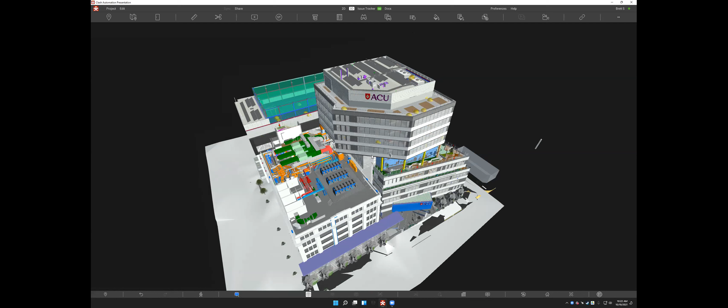And now let's get to the live demo. All right, as soon as I find my Zoom, everyone should be looking at the application. Armin, what's it look like on your end? All good, man, let's get started.

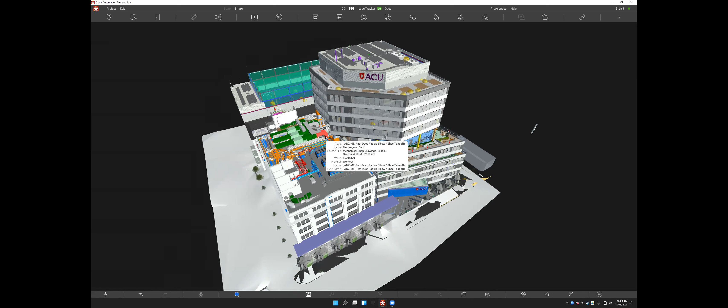All right, so we talked a lot about point A to point B, and I want to point out what this means. If you're a user of Revizto 5, you know you can import the models. Everything comes in through the object tree, and eventually we get to the point where search sets are created. These search sets are point A in this demonstration.

Everything we need can be done here, including creating all the search sets needed for clash, creating exclusion sets to reduce false positives, and organizing these so we know exactly which search sets are for clash and which are for other reasons, such as item counts, navigation, or finding a certain asset in a building. All of this is a very key point in clash detection, and honestly will be one of the main things the implementation managers and I talk about with clients first - what do your search sets look like, and what are you aiming to do with this data?

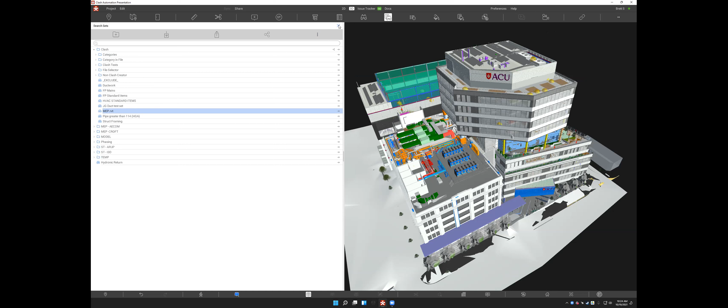Now once we're done with that, we dive into this clash automation tool. We've tried to simplify this as much as we can while leaving as much control as possible. This was one of the difficulties, but I think we accomplished it quite well, as you're about to see.

And I apologize for clearing my throat. My kids brought home a little bit of a cough here, so do apologize for that.

When we look in the Clash automation dialog, we're going to see multiple tests here, see what users are working on those and which ones I need to stay away from. We can see if the Clash has been run, if there have been issues sent, or if they're waiting. The physical number of clashes, how many groups we automatically reduce it down to, resolutions, clash counts, who created it. All of these different items are here for us to see.

If I click on any of these tests, I can actually see all of the criteria that created the test. And when we create the test, you're going to see why all of this is a huge time saver for the way that we coordinate projects. So without further ado, we're going to go ahead and create a Clash test with our Clash automation.

First off, I'm going to go ahead and start to create a new Clash test. This right here is where all of the criteria for the test is put forth. So I'm going to keep it simple, and take the ductwork search set against the structural framing. Now we're going to go ahead and give it a name, duct versus STR.

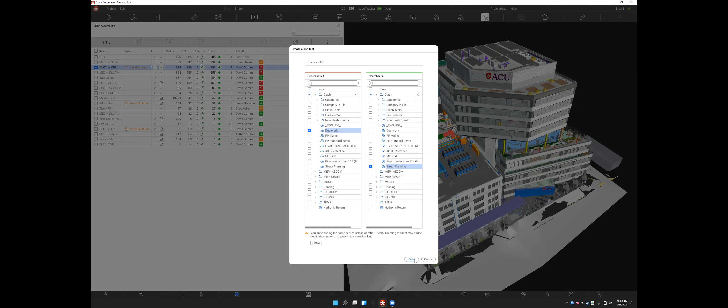Down here, you can see that we've done some other work with some of these search sets that I'm choosing, and it's warning me that duplicated clashes could potentially appear. We're going to go ahead and ignore this, but this is really for your information as you begin to use the tool. This is a demo project, so I think this test has been done before.

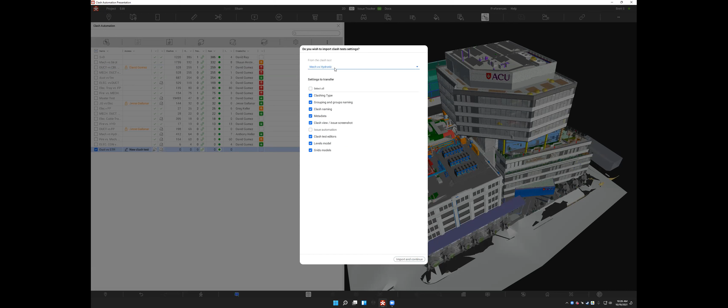Now, when I go ahead and continue, you'll notice over on the left that test is created, and now I can begin to choose what type of metadata I want to be attached to each individual clash. I can do that by choosing the default, or I can even import from another test. So if I want the same metadata from the mechanical and hydronic test for this test, I can choose that and even choose issue automation.

Once I go ahead and import and continue, I can choose the clashing type. This is where we can say, do we want to make sure that these objects are actually touching? Are we looking for a clearance? Each type with a preview of exactly how this works.

Here we can do a clearance in a horizontal and vertical sense, which allows us to provide clearances for things that need a bigger horizontal clearance than they need a vertical clearance, with the ability to choose those distances.

In this case, I'm going to go with a hard collision, and we can also choose elements or geometries. Think of elements as intelligent BIM assets, so these are your Revit families, your CAD groups, your Tekla part files. All of that would be considered an element, and the geometry is the geometry inside of the element.

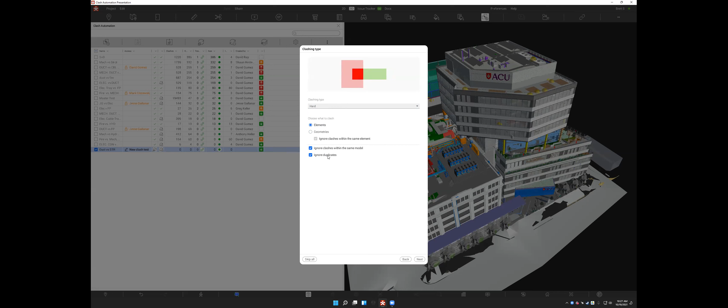We can choose to ignore clashes, duplicates, and as we move through here, you're going to start to see how much criteria we're actually setting up. In this case, I'm going to say I want the room and I want everything to be grouped on what that system classification is.

So I'm going to go ahead and throw that in there, and I'm going to move this up to below room, and we're going to take proximity down to the bottom. You can see it's very easy, drag and drop, right?

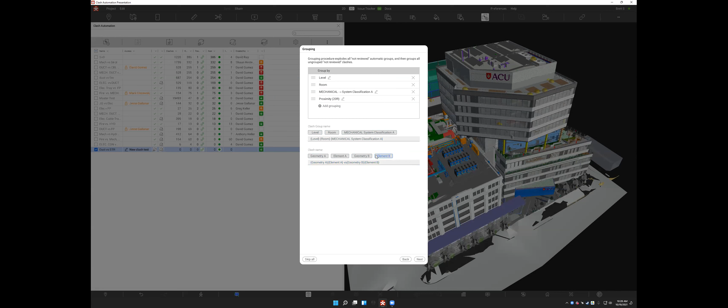And what has happened as I'm dragging and dropping? Our clash group name is automatically being filled out. Our clash name is automatically being filled out here. Everything that we want is being done automatically for us.

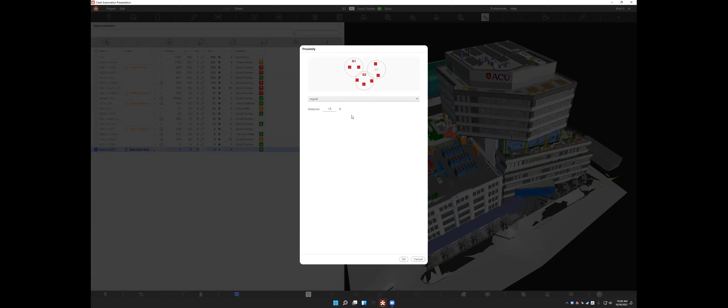Here we can even set a proximity. We have regular chain proximity, set up a distance of that proximity. Proximity is going to be a huge advantage to this grouping tool to avoid things like, instead of items being edited, their GUIDs changing and making sure that those get into the same clash groups that the people receiving them have gotten before. It's an effort to reduce confusion, not only make the lives of VDC people easier.

Once I get done with this, I move on to issue automation. Now in issue automation, this is something that we're going to be talking about. What we hope is that everyone gets to the point where they get to automate everything from the time search sets are set up to the way issues are created.

Now, because the way the industry works, we feel like contractors will take a little bit longer to get to this simply because they work with various inputs, right? Different architects, different engineers, every project, there's different people winning those projects.

But for designers and engineers, you are in control of the way that you create things, which means you are in control of your search sets, your standardization. And we really feel like design and engineering firms are going to be able to almost completely automate clash detection and work it into their services, or just use it to better their final product and make it more constructible.

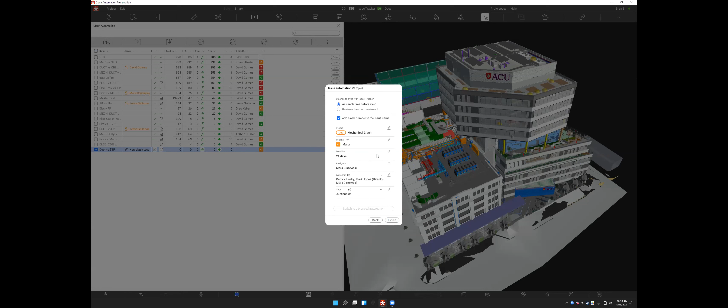Now, before we move on, you'll notice that I can come in here and set a specific stamp that automatically sets up all the assignees, the deadlines, the priorities, the tags, and I can change these on this project as well. I've noticed Mark's over here checking in and checking out stuff, so I'm gonna let him be the recipient of all these. So when I say finish, you're gonna notice that nothing happens. That's because we got to talk about the 3 action buttons around automation.

Now here on the settings, you can see every single piece of criteria. Another very important thing is that we allow you to change views, screenshots, and all of that on the fly. So if I want to come in here and make sure that we're zoomed in real tight on here, I can choose my colors for my different clashing items, including my ability to see clashes that have been resolved inside of a group. I can change what appearance profiler I'm using, how many clash colors I'm indicating, the transparency of my items, the ability to isolate those or show all, apply a section box, set the default section box size, the ability to show grids. All of this is in here and is set up to make your lives easier.

Here you can see for changed clashes. Nothing's worse than sending a clash out to somebody, regrouping it, sending it again, and then being very confused as to why their issue has been changed. This prevents that. It says anything communicated needs to be solved, and anything that hasn't been communicated yet still has the ability to be manipulated. Now, if you don't like that idea, we have the way to make sure it updates all the time or never updates. But we really like this ability to bring the workflow more automated and communicative.

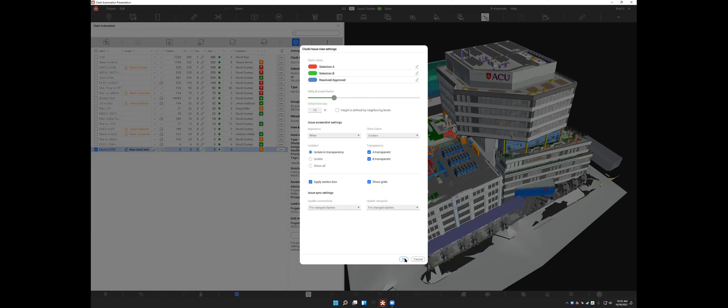So once I set all this up, now it's time to actually see some results. Now, before I push the results, I'm going to explain these 3 buttons up here. This button here runs the clash detection. It provides results, but does not create issues, and gives the collaborators and coordinators the ability to vet those results before they create issues. This button here sends any reviewed results to the issue tracker. And this button will allow you to automate everything at once, given that your search sets and your criteria are set up in a way that reduces false positives to almost a 0 value.

So let's look at the performance of this. We've got our criteria set up. I'm editing this new clash test. I'm going to say go. 1,220 clashes, reduced to 311 groups in one test, and I didn't get a chance to hit my stopwatch, so I have no idea how long that took. But I don't think it took very long.

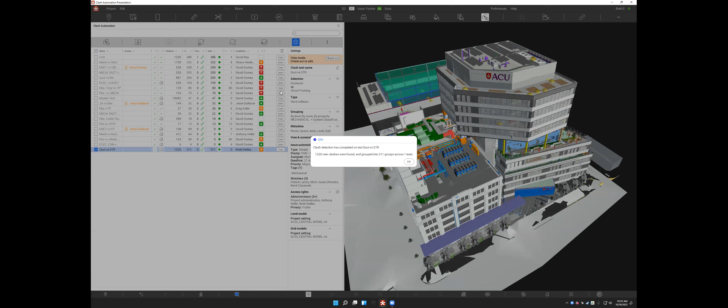2.5 seconds. Did you time it, Armin? Yeah. So yes, I was too busy thinking about what I was going to say next to actually hit the button.

So in here now you will see 1,220 hits, 300 groups. 0 of those groups have been resolved. Let's take a look at those results.

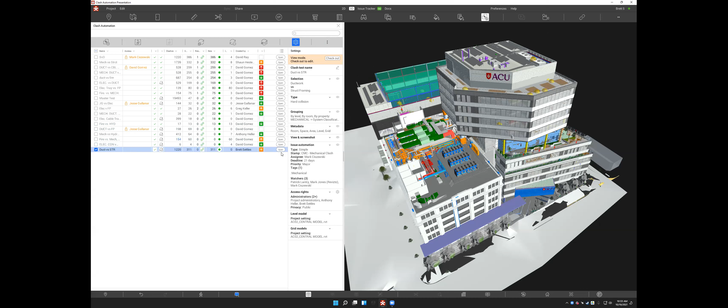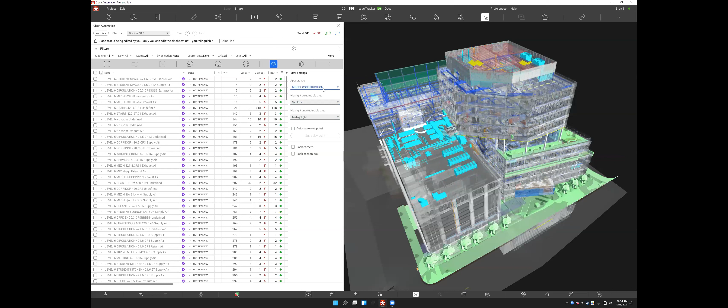When I look at the results, I get my white appearance profile. Now this is my preference. It doesn't have to be like this. We can go to a model design appearance profile. We can choose a model construction appearance profile. Personally, we like the white. We think it pops whenever you start filtering and looking at results.

I'll give you a really good example, a really good, powerful example of what we can do here. I'm going to go ahead and switch to a top-down view, right? There's one of them quality of life improvements that we were talking about. So I showed one. There are 149 of them that I'm probably not going to get to, but there's one of them.

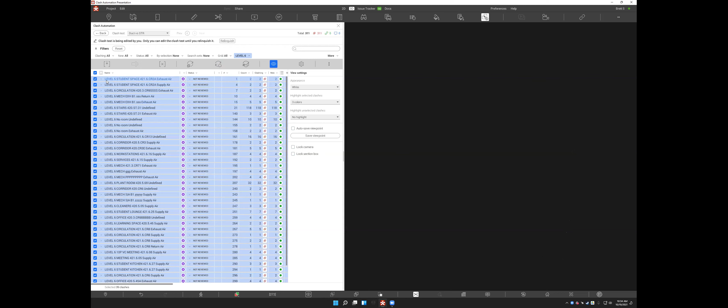So in here now, let's say I really need to see all the clashes on level 6. I can enact that filter there, choose this, and this should bring me directly to my clashes. I know what I did wrong. So let's go ahead, I'm going to put this in that top-down view. Forgot to lock my camera and my section box here. So let's go ahead, choose level 6.

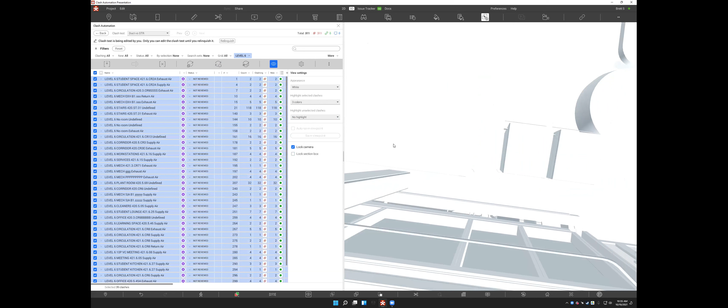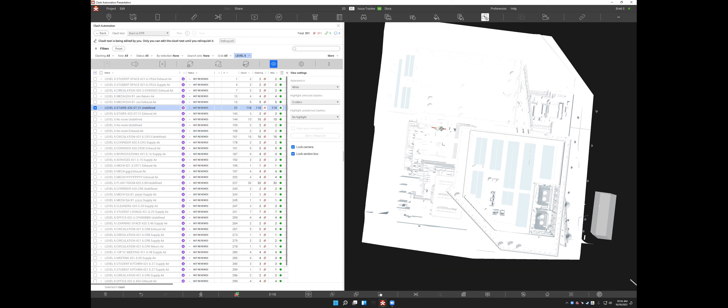I'm going to go back out to a top-down view, and now we're going to actually see all those clashes on level 6 right there. If we lock the section box, we can begin to toggle through these clashes and actually see where they're positioned in that top-down view. We can choose all of them and see exactly where all of those clashes are.

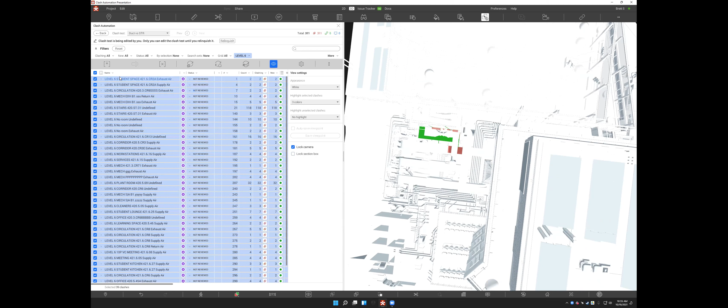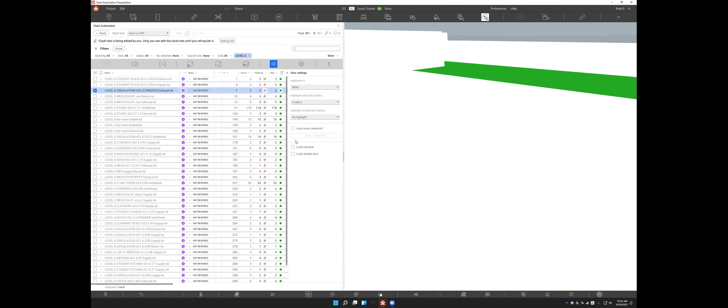Now, what's really important about this is that this is what allows us to do that macro viewing, where we can see everything from that high level down on level 6. So if I go to individual ones, this is what allows me to see those individual clashes. I'm going to make sure that I'm isolating those and taking a look at them individually.

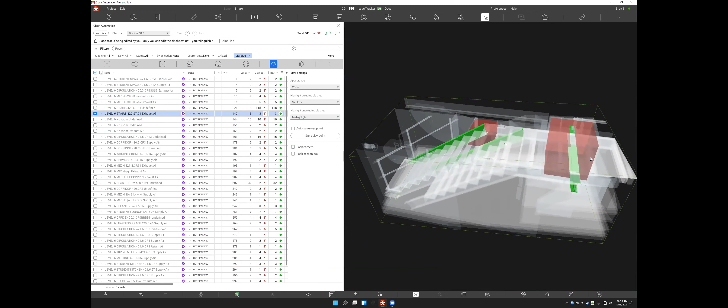So there we can see how the clashes are showing up, and we can even go back in and apply a section box, quickly showing us where those clashes are. So this is one thing to keep in mind as we're reviewing these clashes, is that there's multiple ways to view them. Now, you'll notice that with these filters, we have very powerful ways to retrieve this information.

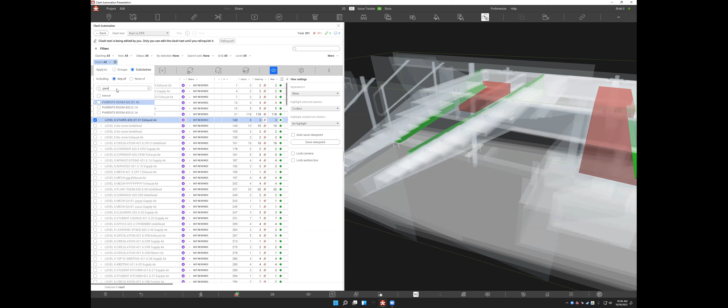Another one I like to use is room. If we want to find clashes that have to do with this specific room, I can even search for that room, select all of a certain type, and then immediately see where those clashes in those parent rooms are by simply filtering the data. So those metadata aspects of the software are extremely important, not only from a criteria set, but from a way that you can retrieve them out of larger pieces of information.

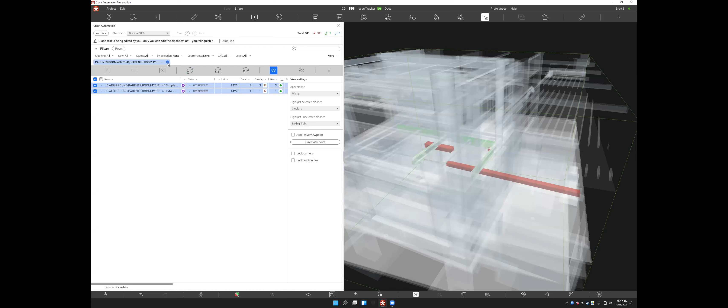Now let's get into what the coordinators are going to be doing here. As we look at all of these results, those coordinators are going to be looking at individual results and determining if those results are in fact issues or not.

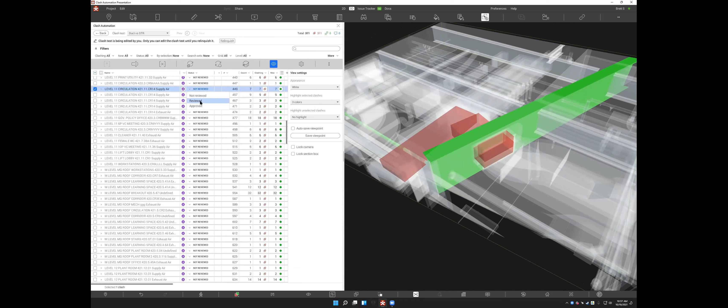So in this situation, we can look at this result here and we can absolutely say that this is an issue. Set that to reviewed. We can then say, this is an issue as well. We can mass review these as we look through them and say, yep, all of these are issues as well. It also allows us to approve clashes that may not be actual issues that we've resolved in the field. And more importantly, it allows the coordinators to communicate what they finished, but not have to finish everything at all.

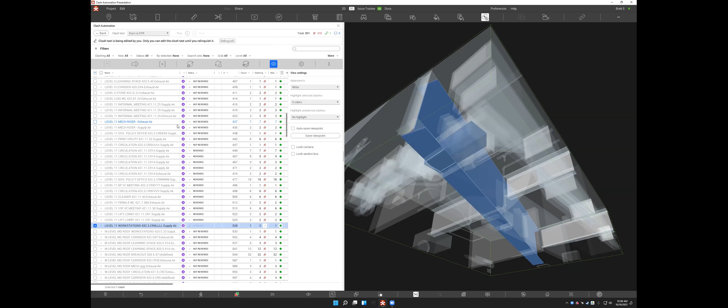So this is where in the daily life of a coordinator, they may be sitting here reviewing clashes, they get tapped on the shoulder, they have to get pulled off to something else. And they really want to communicate all of this, but they're being pulled away. Instead of remaining that bottleneck in all of this information, they can simply come up here and synchronize what they've reviewed to the issue tracker. Whenever they synchronize this, anything that's been reviewed by a coordinator and determined to be an issue is automatically going to be sent to the issue tracker.

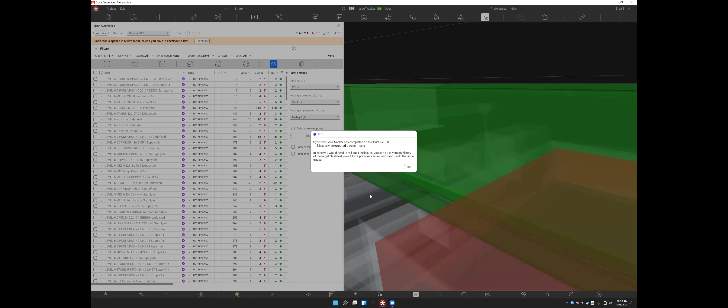So once it relinquishes my test here, I'll get back in. And what we can see is that now those issues, let's go ahead and check this out. If I scroll over... let me see real quick. Let's go to status, that's what I should have done to begin with.

All of these filters at the top are completely filterable. There you can see the reviewed issues that we have. They have an identifier, you can tell that they've been issues, and we're not going to regroup anything that has been communicated to the team. Everything else that hasn't been reviewed is up for a regrouping.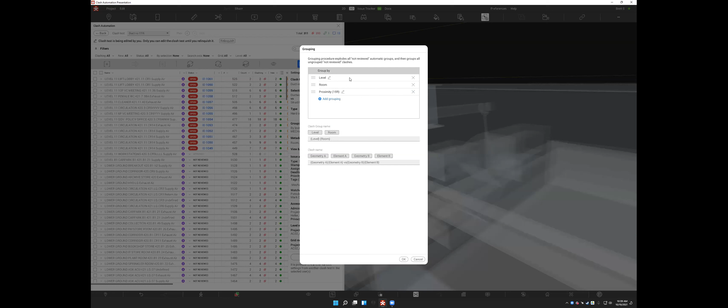So if I go in here and actually change the way that I want to group these issues, let's say that this isn't working for us. I just want to do it by level, room, and proximity. I can say okay, regroup that. We're going to see everything change except for what we've already communicated. This way we can change our processes on the fly if needed.

I'm not saying that this is the best way to do a project, but it does happen. And I think everyone in the room understands that this does happen.

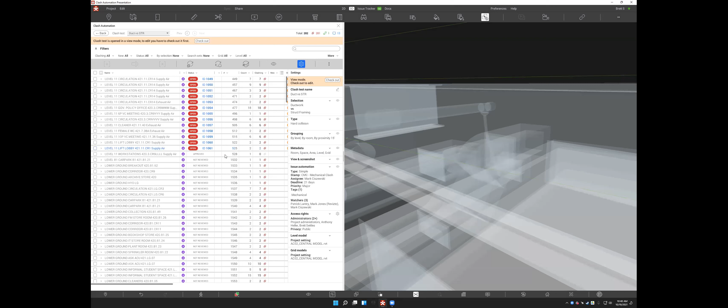Now, as we go through and rerun this test, we're going to see no new clashes were found, but now we have a completely different regrouping of the way that the clashes are put together. As you can see here, now we're doing it by simply level and room, but everything that we had already communicated is still there.

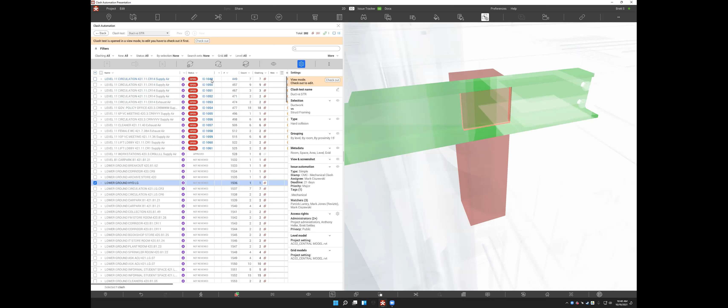Now, I think the most important thing is, what was point B this whole time? Well, of course, point B were the issues that the individuals who have to solve these issues are getting. And I think this is very important, in that we can see now that all of this automation and clash testing ends up connecting to what we're already good at.

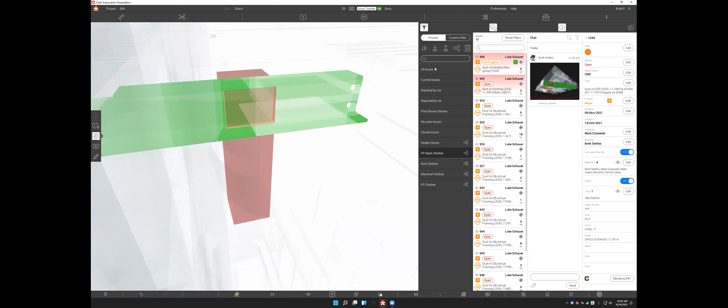1,000 issues, right? Well, I'm just working on fire protection clashes. I can reduce that down to 13.

I can see the screenshot. I can see the grids. I can see the 3D part of this. I can change my appearance profiles as needed based on what I want to see.

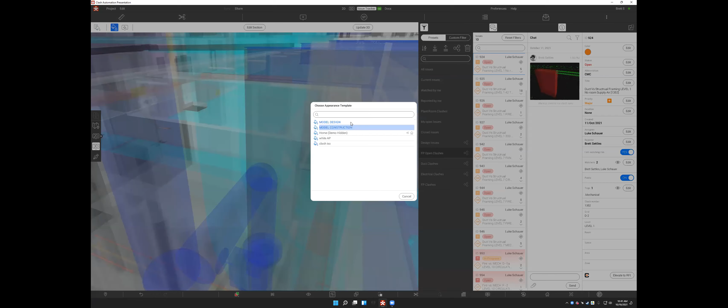So there we can go model design, model construction, or we can go all the way back to the white appearance profiler. We can also see exactly where this clash is in 2D. You'll notice that the stamps have been updated to show that this is a clash represented by the diamond shape, but we've incorporated all of our stamp aspects to it.

Everything that goes into here can be reported on, just like it always has in Revizto, including all of the advancements that we've made to reporting that went live soon. As you can see over on the right, Mark Zazeski is already collaborating on this clash detection issue.

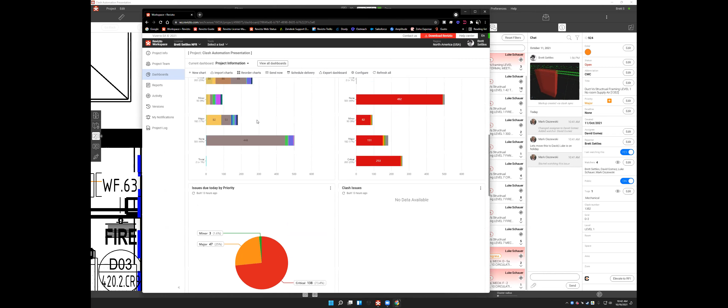And here is all of my project information right here. So we want to add a new chart based on any of those clash tests. That's where we can come in here and begin to work on clash test reporting and completely automating that.

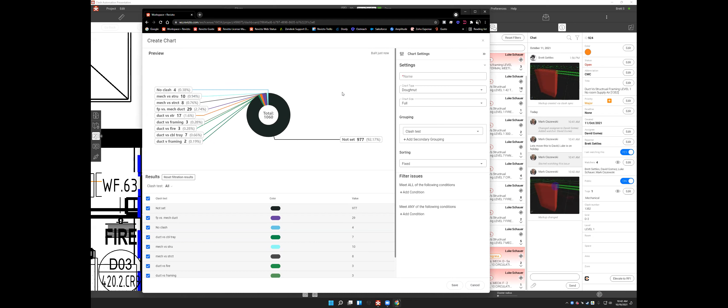Here we can see all of the various clash tests that we're working with. Here are all the settings for the colors that are represented. Everything here has been new and improved to assist in this new functionality that you're getting on that report side as well.

So here we can say ascending by value, and we can say who are the assignees, or more importantly, what are the statuses? What are the priorities? All of this is included in here.

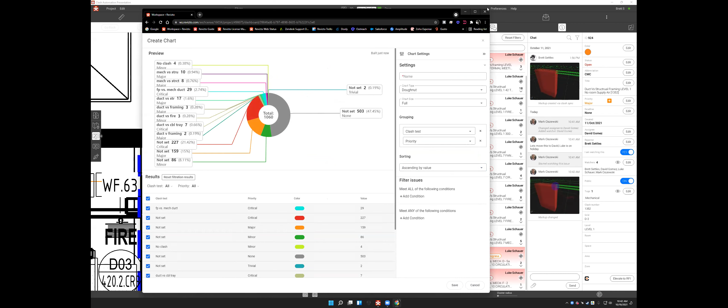So it was not only the technical tools that I feel like were really valuable to this process, it was the way that it connected to our issue tracker, our reporting, the way that we import models. All of this now is the way that we can standardize on coordination.

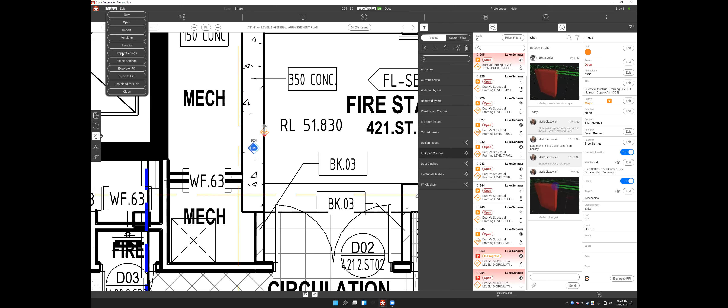And I think the most important part is that everything that you've seen here is going to be able to be transferred from one project to another to create that repeatable process.

So in here, when I'm working on this, as I go back as that coordinator, once again, we can see others working on that test. I want to see what's going on in this test. I can't work on it though. Jesse's working on it. This ensures that everything that's done during coordination is going to be valuable and not rework when it goes out.

Now, Arman, I've kind of went through some of the topics, but is there anything that I'm missing that you'd like for me to touch on before we go ahead and wrap up?

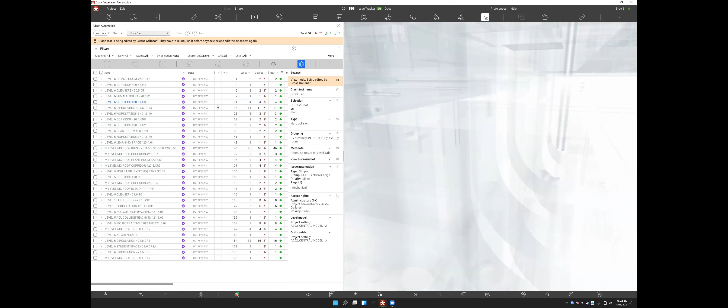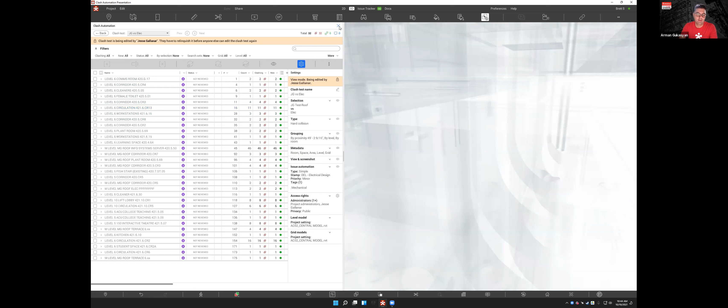Not really. You covered the main ones, but I would just basically recap on what are the real values that are standing out in clash automation right now. This is what we have done in grouping, what we have done in clash cloud coordination, etc. But that's what you have outlined. I think you covered it all.

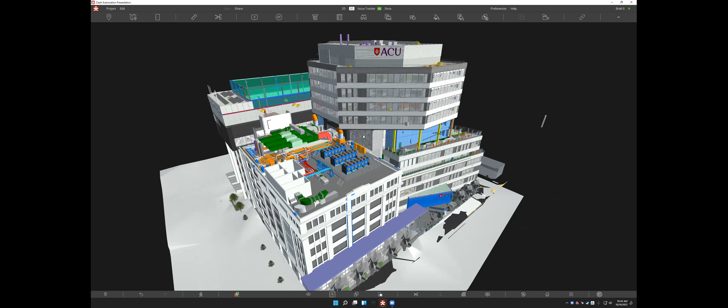Absolutely. I mean, I think that the biggest thing about this is that we're, once again, going back to automating that labor and allowing the users to still have control.

I want everyone to think about what Arman said about how many different tools it normally takes to do what we have shown here today. You need a coordination platform. You need an issue tracking platform. You need a way to communicate. You need a clash grouper. You potentially need some other tools in order to sort your data.

One of the things that we haven't shown today, which will make it into a soon release, is the ability to automatically create level section views based on the intelligent model data. What we are trying to do is allow everyone to standardize, compact their tech stack in this space of coordination and collaboration. And we feel like that we have really incorporated this sort of hodgepodge of applications that have been needed to complete this into a very, very modern and affordable software.